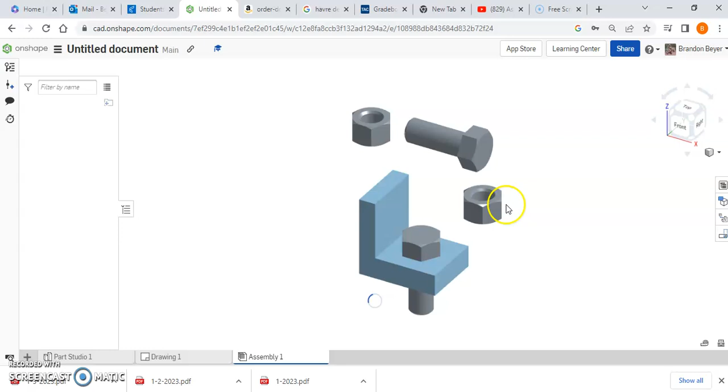So first off, we are going to just make a cylinder, something relatively simple. Let's just go in here. This will work. I thought I just made a blank one. Where did it go? Okay, so we're going to make a new document. Hilt play 2. Not sure what happened to the one I just made.

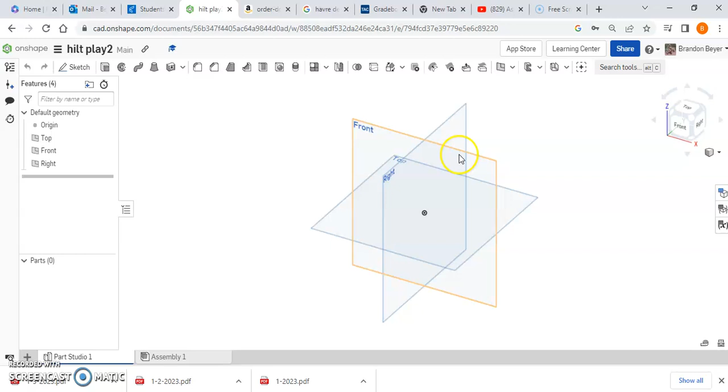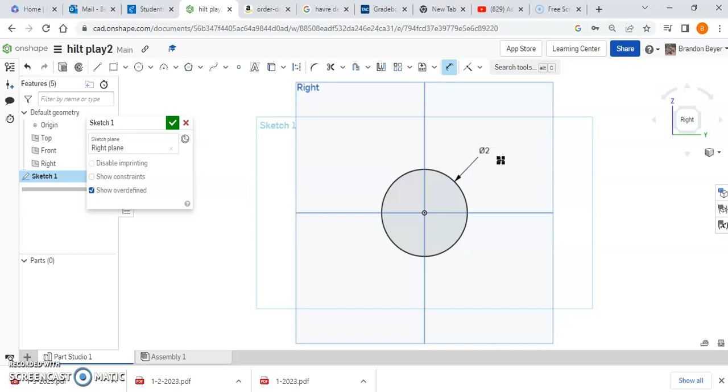Okay, so first off, I'm going to make a cylinder from the front, top, or right side view. It doesn't really matter, I'm going to go ahead and use the right side, I think. And we're just going to make a simple circle for starters, I'm going to say about 2 inches. Finish that sketch, I'm going to extrude this out.

And really the goal of what I want to show you guys today is the wrap tool and the pattern tool as well. So I have a 4-inch long cylinder, 2 inches in diameter. This could be any part, really, of the hilt. It'd probably be a little long for an emitter or pommel, but handles, controls, maybe internal pieces. It really just depends what you want it to be.

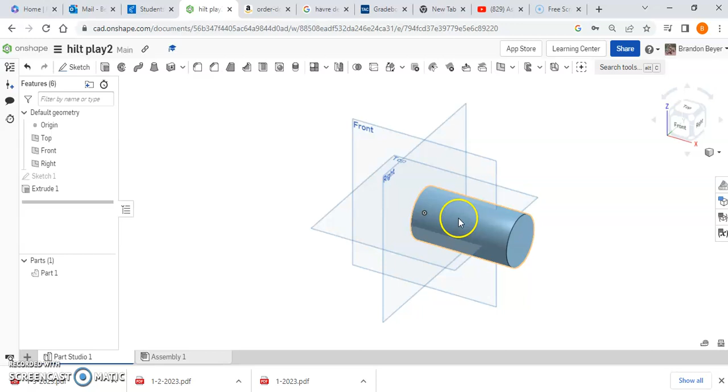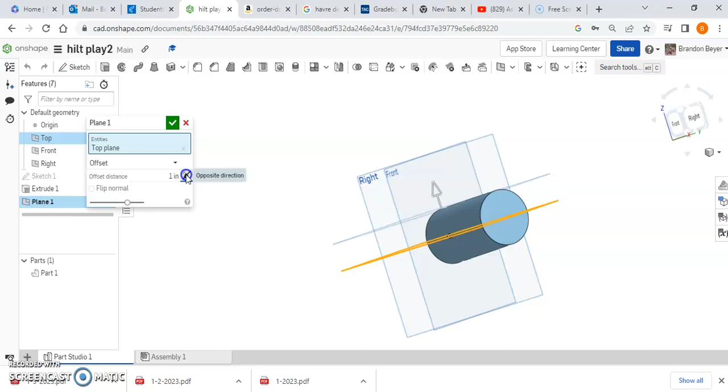So first thing I'm going to do is I want to draw on the outer surface of the cylinder. So I'm going to take my top plane, right-click, and I'm going to offset plane. And because I know this is a 2-inch diameter, I can offset this orange plane here up 1 inch, and that number is going to be right here. If I want to go the opposite direction, of course, you just hit the opposite direction arrow, and it would go the other way. 1 inch is good for what we want.

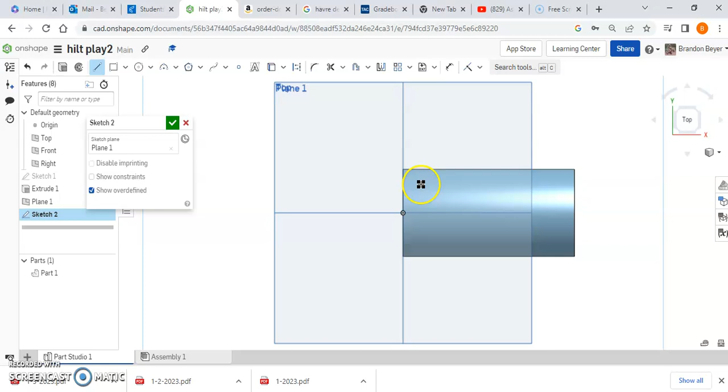I'm going to hit the green check mark, and now I have this plane 1 that is sitting on top of the cylinder. So I'm going to make a sketch on top of plane 1, rotate around, and I could draw any shape here that I want to as long as it is a closed shape. So I'm going to go ahead and just do a simple triangle. I'm not even going to measure it for this. And I do want to get this triangle relatively centered.

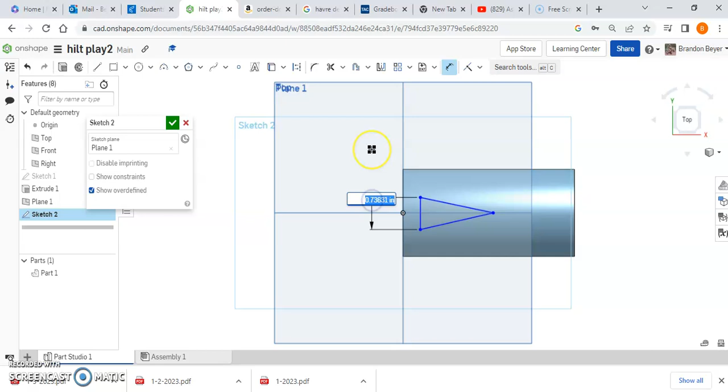So let me throw some dimensions on here real fast. There we go, I'll just do it like this, it'll be a little easier. Okay, so let's call this 0.5. And that should be centered as long as I have set the 2 sides of that triangle to be equal. So they're equal, now that should be perfectly centered.

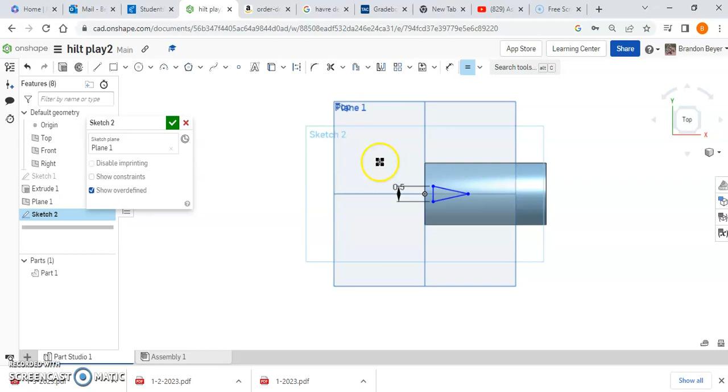Yeah, so I'm going to take that triangle, which is kind of floating on top, so I finish my sketch, and if I turn this around, you can kind of see that the triangle is actually floating on top of the cylinder. It's not sitting against it. So to get it actually down on the cylinder, we have to do what's called a wrap.

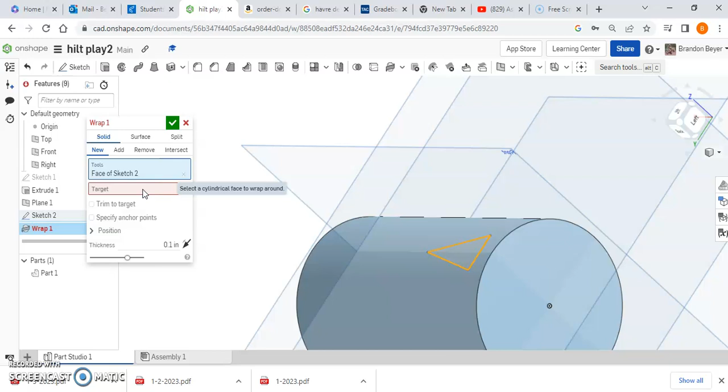So depending on how you're zoomed, this may be a drop-down menu here, or the buttons may be kind of just spread out. If you click the drop down, you'll see this wrap tool. So I can now select any sketch really, and I'm going to go solid here. Click the triangle, and it's asking me what I want to do. Next, it's saying the target, so what do I want to wrap it around? So I click target, click the cylinder, and this is going to wrap around the cylinder.

So there you have a perfect triangle that's now wrapped around that contour. You can make this a totally new part by clicking new, or you can leave it as an add, or you can cut a hole and make it remove.

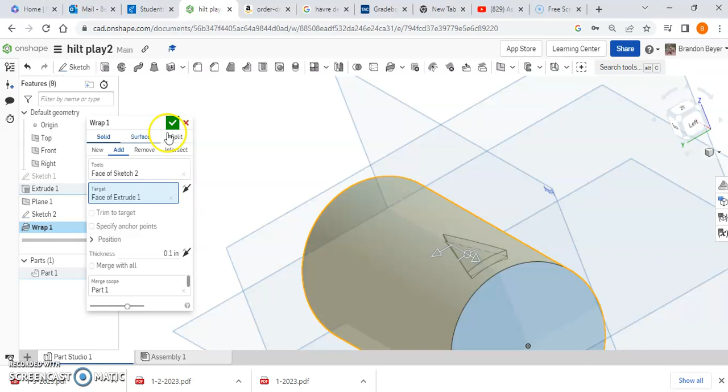Any of these options will work. We're just going to do add to keep it simple. Hit the green check mark, and there's the triangle. It's now wrapped around the cylinder. So if you're just trying to wrap any kind of shape on there, that's pretty easy to do.

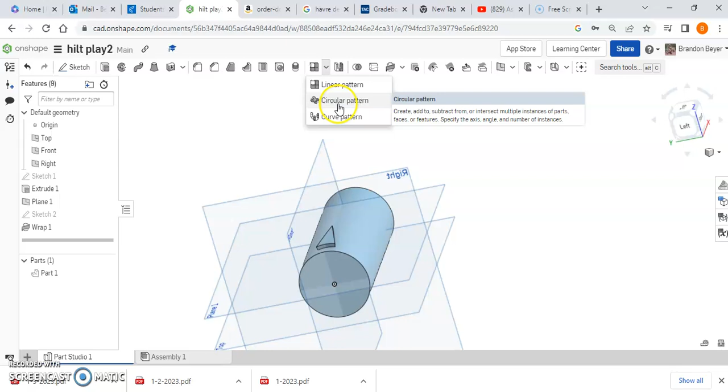But if you want to make a pattern, this is where it gets a little more complicated. You have a pattern tool up here. This is a linear pattern or a circular pattern. We're going to start with a circular. I'm going to click on that triangle, but right now it's not letting me select it.

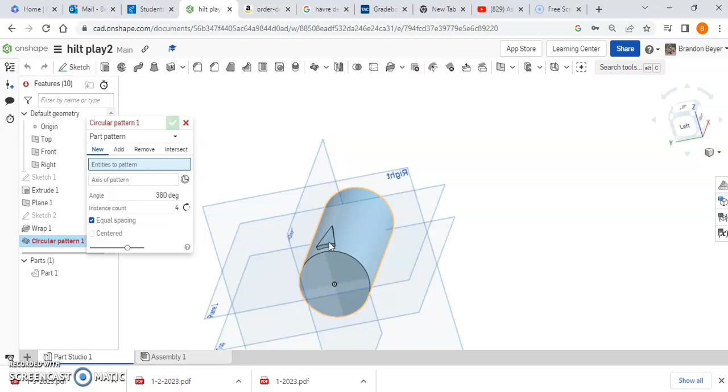There's a drop-down menu here at the top that says Part Pattern. If I would have made the triangle a new part, it would have allowed me to select it and copy it as a new part. But because it's just added, I have to go to Feature Pattern because it's a part of this part. It's not its own individual piece, it's just part of this. I know I'm using the word part a lot.

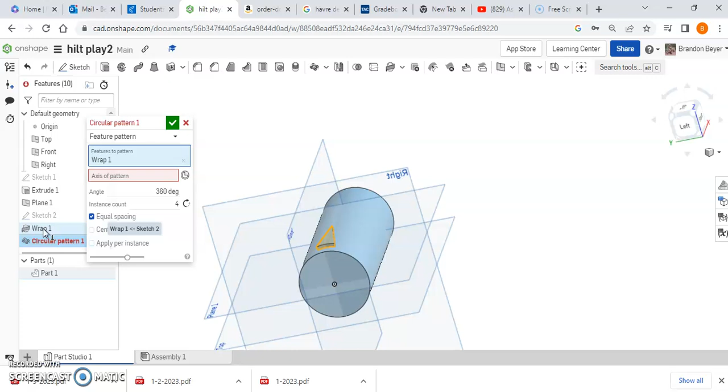So it wants to know what feature to select. If you're not sure, or you can't quite grab it, it's easiest if I just go over here and click on the feature and it will select the whole feature. Then it needs to know an axis—what am I rotating around? Click this and just select any arc or circle and it will start to copy those going all the way around in a pattern.

Now, I don't want 4, I want a whole bunch of them. So let's just try some different numbers here. I'm going to do 20 and see what that looks like. They're overlapping, so it's angry. Let's change that to maybe 12. Ah, that looks better.

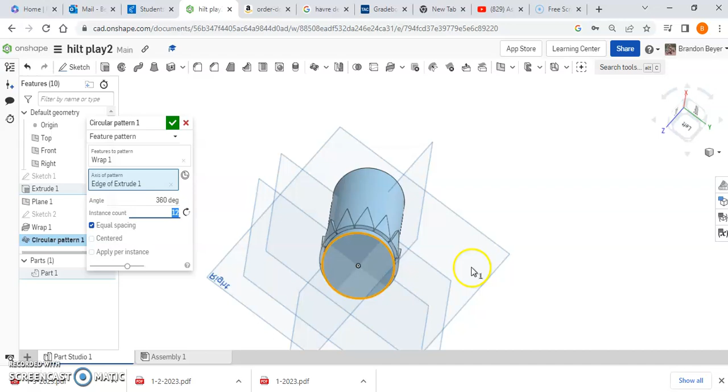So now it sort of has a nice little crown on there, if you will. And you can set that number to pretty much whatever you want as long as they're not running into each other. I do want a little bit of a space, so I'm going to do 10. Go ahead and I hit the green check mark. It's going to create those in a circular pattern.

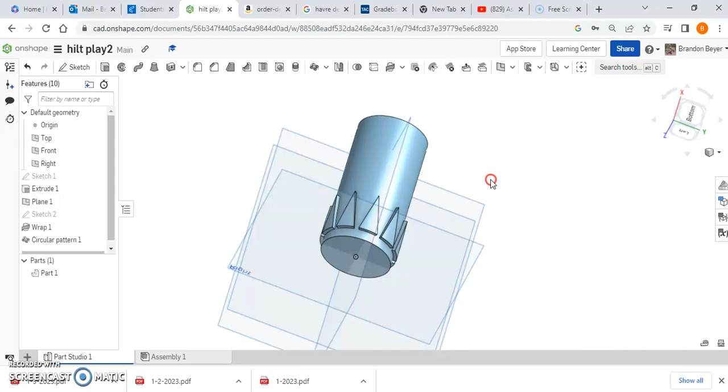Now, if I want to take this one step further, I could also do a linear pattern with this circular pattern and actually send them all the way up and down my block. So I'm going to go up here to linear pattern, select the circular pattern.

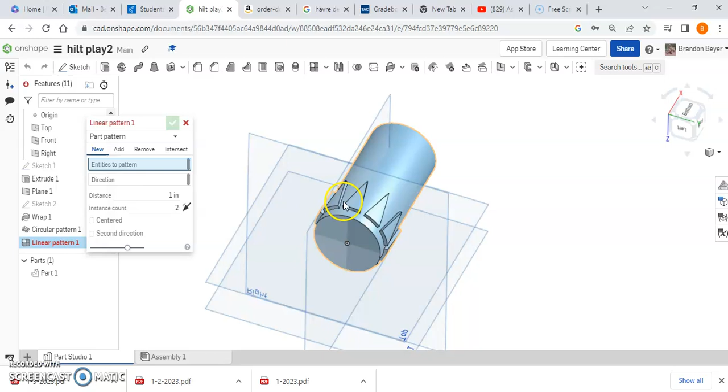Oh, I have to change this to feature again. Click on the circular pattern, and I'll click the original one as well. And I'll set the direction to the cylinder. And now I can just change directions. I can set the space between them.

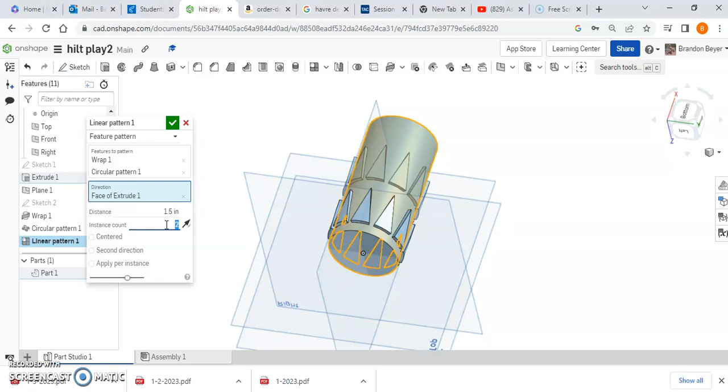I'll make this 1.5, see what that looks like. And there you have another set. If I want to do this 50 times or 60 times or whatever, you can just add more occurrences down here and it would add more and more of those. So you can get a whole bunch on there.

I think it's angry because I fell off the piece. Let's try 3 sets, see if that lets me. Nah, it still doesn't like it because it's floating off the end. So, depending on what your shape is and how long you want to go, I'm sure there's a way around that to make it accept it, but you can do that there as well.

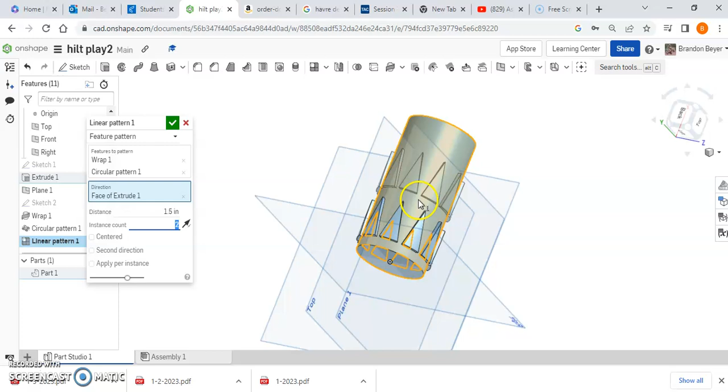Let's say you wanted the triangles to go the opposite direction, sort of intertwine with each other. There are other tools up here that you can experiment with, like the transform tool. This will allow you to move, rotate, copy, scale, transform different parts and pieces and kind of change them about. So there's a lot of different things there that you can do.

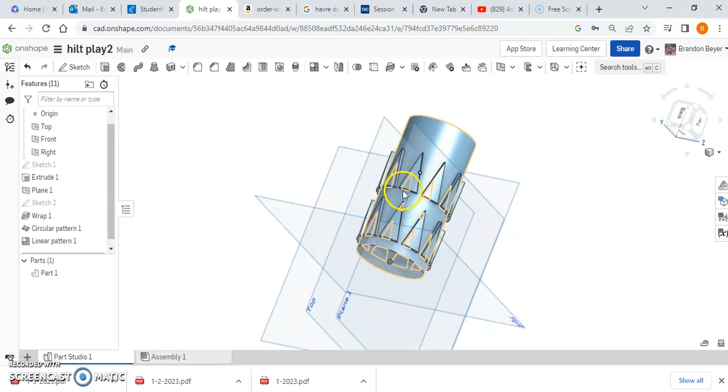But this should work for what we're trying to do at the moment. I did want to go over a couple other things you can do with the wrap, because the wrap is a really powerful tool. If I go down here to the position and change the angle to, let's say, 15 degrees, notice what happens to the triangle. It's going to turn the triangle.

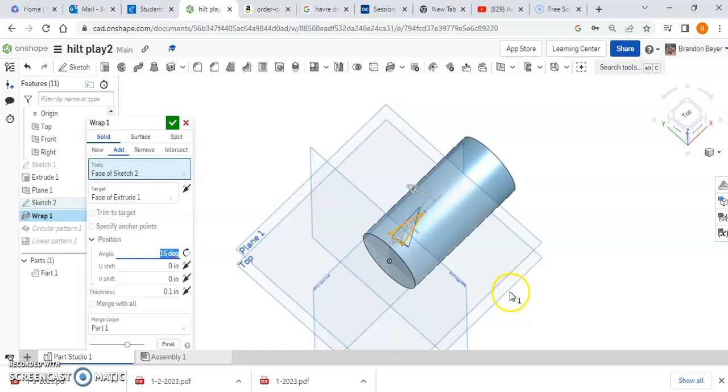You can also shift the triangle up and down depending on how you want it to move. Let's say I wanted this triangle down further. I can change, I believe it's the V shift. Let's just make it 1 inch. And you can shift it right off of the cylinder and it will still generate that just fine.

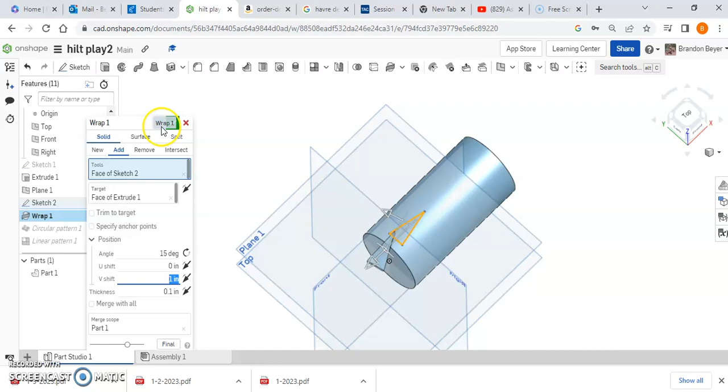So there's a lot of different things that you can do with the wrap tool. It's a pretty powerful tool. Just be aware that as you update this, you may have to make new selections with your other tools as well so that they can continue to function as they are meant to.

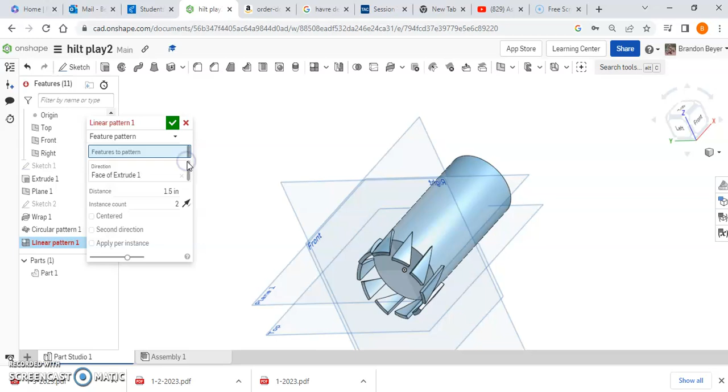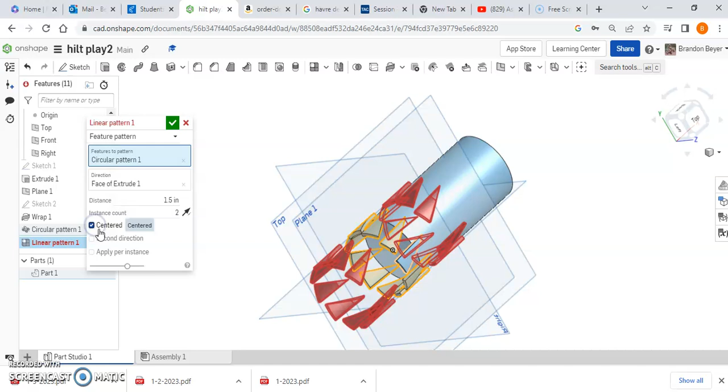Notice the linear pattern now is red. It's not sure where that original geometry has gone. So if I cancel these and reselect, for some reason it doesn't like that. Not sure why it's giving me a red there, but it's typically just a matter of clicking around to some different things and getting it to do what you want, essentially.

So some pretty neat stuff. That wrap tool is very powerful, very cool. You can just wrap sketches if you want to. It doesn't have to be a solid shape, but those are some options for you there as well.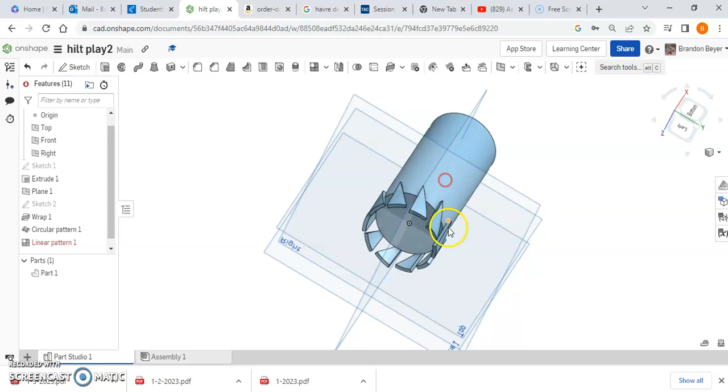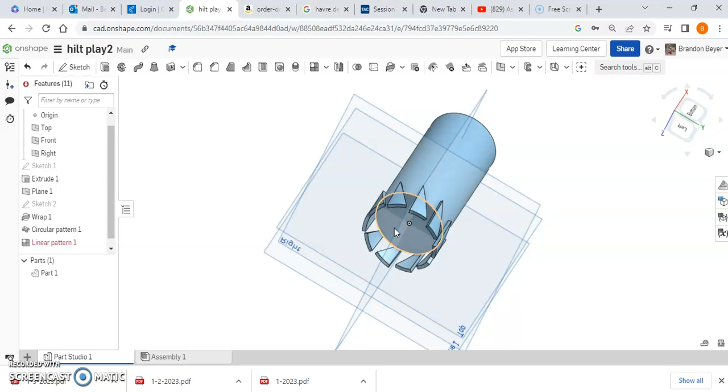I have had some issues trying to wrap onto an ellipsed cylinder or a lofted cylinder, which are these tools here, which I'll probably cover in another video. The sweep is right here. Ellipse would just be drawing an oval instead of a circle when we do that first extrusion. But it doesn't seem to like surfaces that are not consistently round for the wrap tool. So I'm still trying to work out the kinks with that.

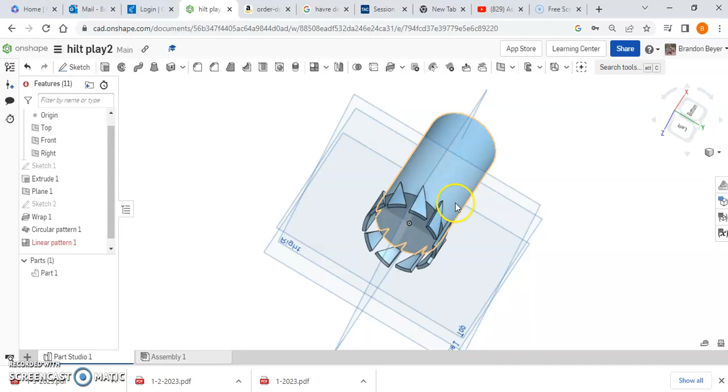I imagine maybe if we paid for the Pro or the Plus or something, that may allow us to do that in Onshape. But for what we're doing, this is still really powerful and really cool.

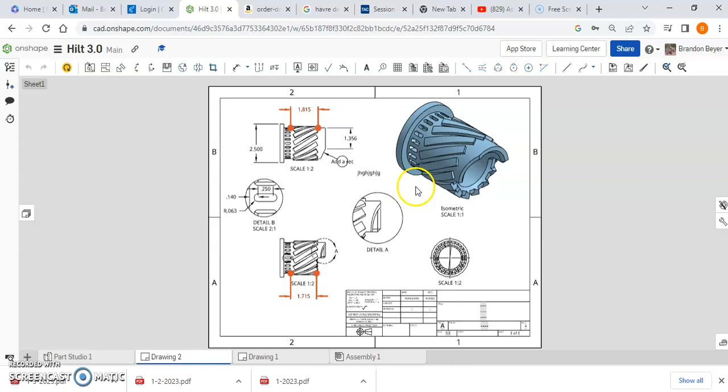So I want to show you what I've come up with so far, which if you're in class this year, you've already seen this a dozen times probably. But really, my entire hilt so far has just been a series of students asking me how to do something and me experimenting with it and sort of adding different features to different things. So I just showed you all the steps necessary to do these holes and how to do this slot here at the top.

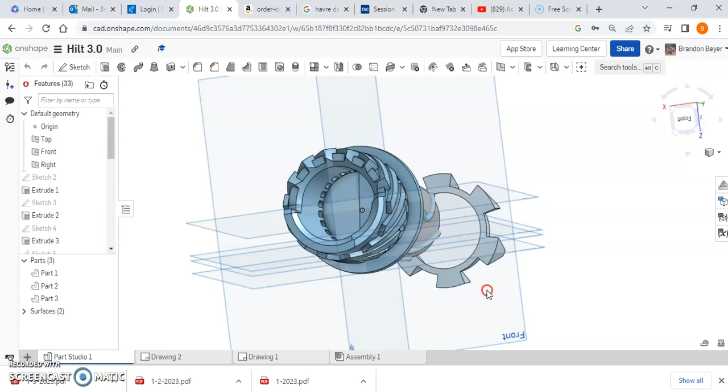As far as cutting away the top section there where it's sort of missing, it's easier said than done. Just think about it in simple shapes. If I turn this sideways, I am essentially just cutting away a square and extruding it across.

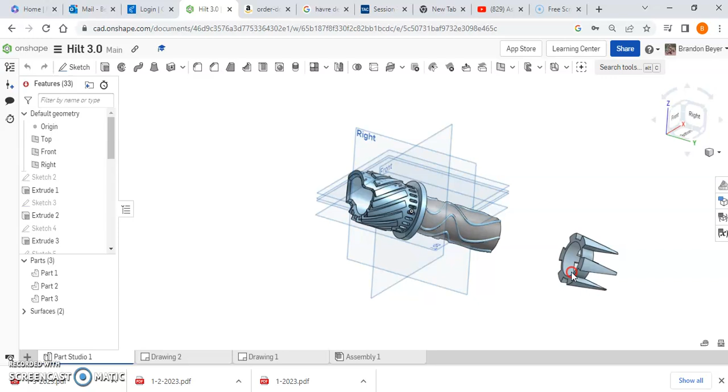Or if I turn this a different direction, I'm cutting this away in the same sense. So just a little triangle there that I've cut off, essentially. And then the hole in the center is just a circle, extruded down through with a remove. So this doesn't have to be as difficult as you might think it is.

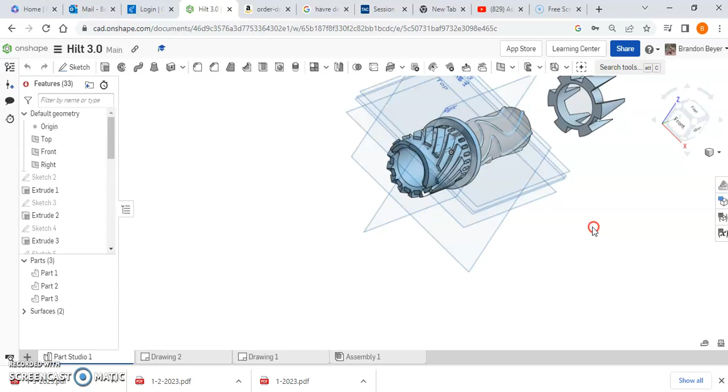This back piece here is really simple. It's kind of a happy accident how this turned out. It is just this sketch that has been extruded with a draft. So I'll scroll down and show you how that looks. And I'll be done in just a minute.

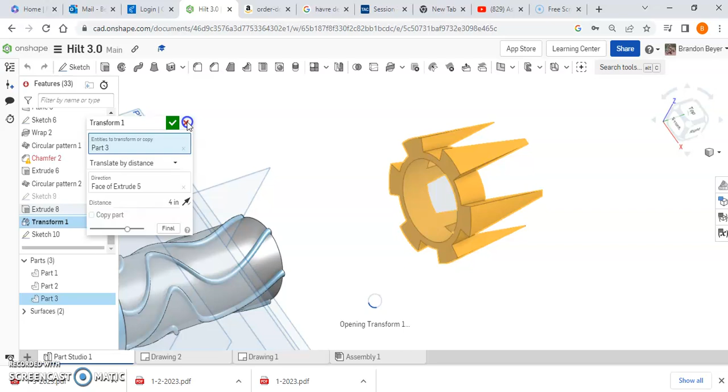Not the transform, the extrusion. So this is just a regular extrusion. I took this simple shape, kind of looks like the Imperial logo, and I added a draft to it of 6 degrees. And then you sort of get this crazy castle crown looking thing.

So hopefully those features help you out, and good luck with your drawings.